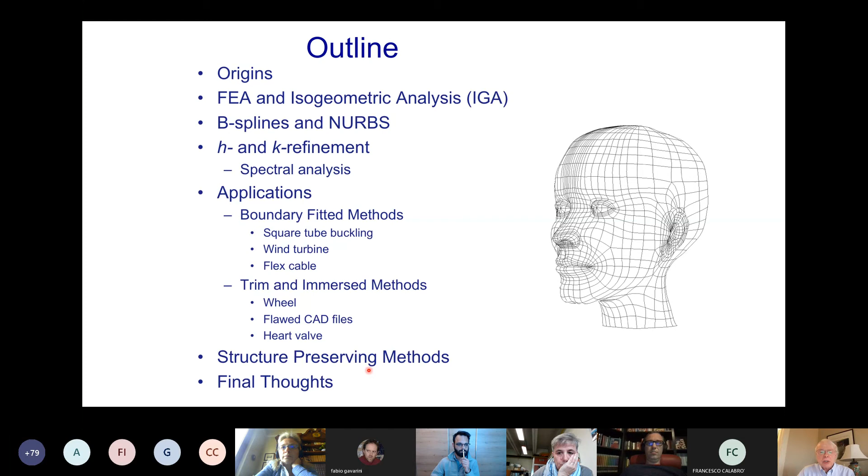Then I'll show a number of applications just to show you that this topic has gone from, let's say, its elementary beginnings to more complicated real-world applications. And then, as I said, a little bit about structure-preserving methods and some final thoughts.

So the origins of IGA really began when a number of individuals were telling me about problems they were having in industry. In industry, when you do engineering analysis with finite elements, the finite element models are created from the designs. The designs are encapsulated in CAD representations, computer-aided design representations. The interesting thing about that process is it's much more complex and time-consuming than one would initially imagine. You have to fix CAD geometries to make them suitable to generate finite element models, at least traditional finite element models. And this accounts for a huge portion of overall analysis time. It's a major bottleneck in the product development process.

There was a study done at Sandia National Laboratories, and there they have about 10,000 people, and most of them, I'd say, are computing. And so they do an inordinate amount of finite element analysis. So they were able to get very good statistics on the process. And they sort of confirmed that and documented that in a famous report, the DART report. But this comes from all different sources. The Navy, the US Navy, was very influential in getting me to look at this problem, because they were getting situations that were even much worse than this.

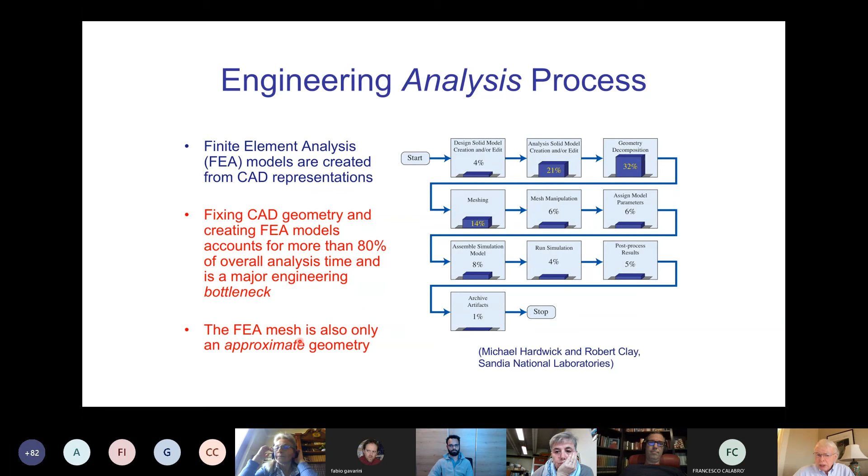In addition to creating the mesh model, you have to do certain things. You have to remove features. You have to heal damages, flaws in the CAD file. And in the process, you really recreate the geometry. So you wind up approximating the geometry. And that can be severe if it comes to higher order techniques.

So what's the problem? Why is it so time consuming? Well, this is a simple model. This is just a part from a Honda. That's a B pillar. And it's one piece of metal. It's been cut, stamped, holes have been drilled into it. And so you would imagine it would be very simple to generate a finite element mesh for that part.

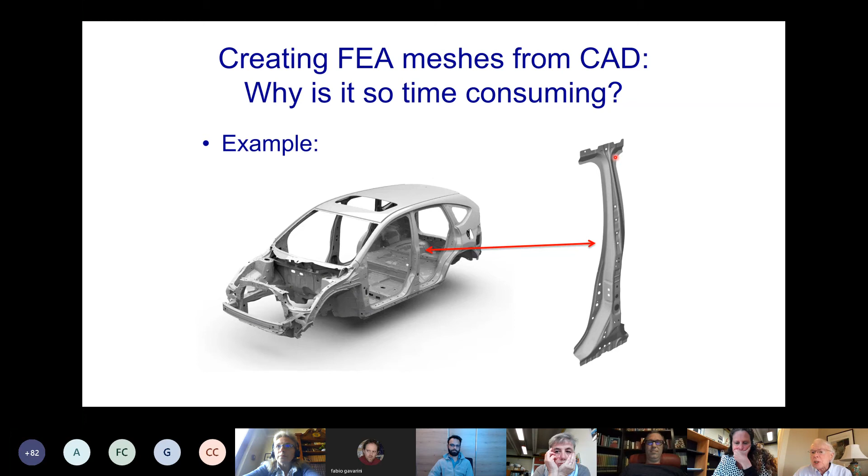Well, it's not so simple when you come to the data structure. The actual data structure consists of 1,280 so-called trimmed surfaces. Those are images of rectangular patches that intersect, and those intersections are not watertight.

Mathematically, they can't be, given the underlying order of the functions that are utilized. So you have gaps and overlaps, and to produce a classical finite element mesh, the CAD file has to be rendered watertight. And so you have to fix it. And that becomes an ordeal. Imagine this one little piece consists of 1,280 images of rectangular patches.

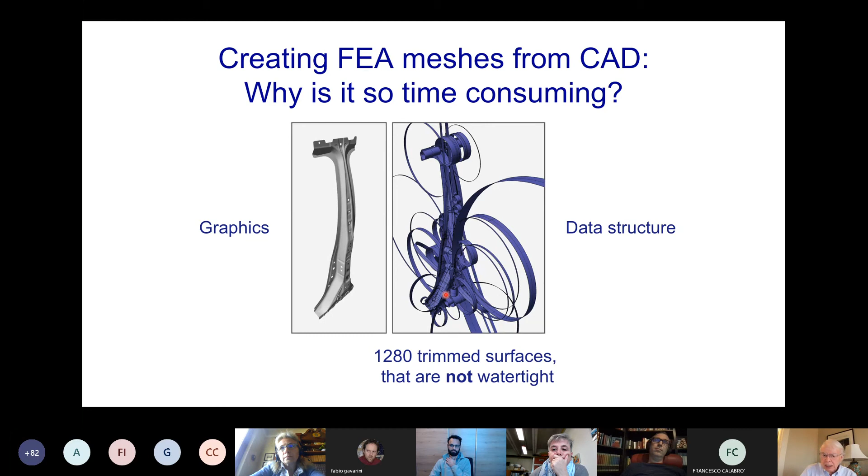So what are the problems in total for FEA? Well, model creation, as I just indicated, geometry errors. If you have to make simplifications, you might be removing fillets, small holes, replacing fillets with sharp corners, things of this kind that can really change results.

Another problem is closing the loop with design optimization. You want to automate the design optimization process, so you have a loop doing forward analysis, and then you change the design according to the outcome of that analysis. Now, in traditional FEA, once you're done with the analysis, you have left the data structure of CAD, and you have to bring the FEA results back to CAD. And sometimes that amounts to just walking down the hall and telling the designer what the changes are that need to be made. You'd like that to be completely automated. So this is a problem with FEA.

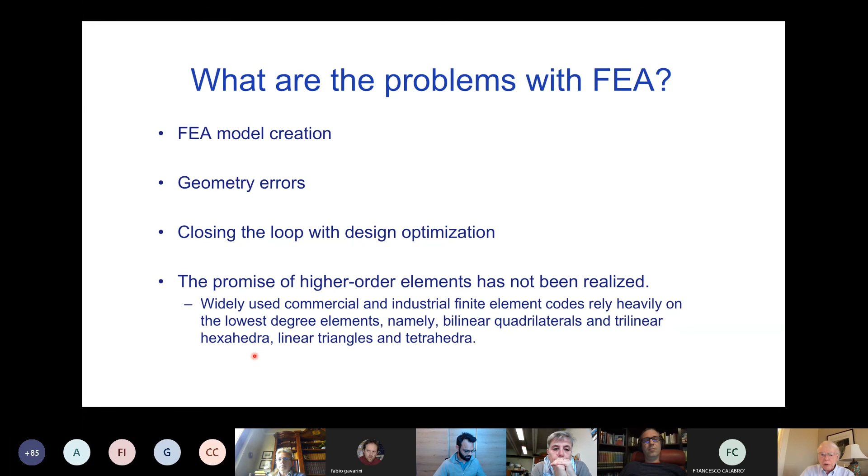I'd say the final problem, and one I'll speak to as we go along, is the promise of higher order elements in FEA has not been realized. If you look at widely used commercial and industrial finite element codes, they rely heavily on the lowest degree elements in structures, bilinear quadrilaterals and trilinear hexahedra, and in fluids, linear triangles and linear tetrahedra. So why is that? I mean, the academic literature would suggest that higher order elements are capable of higher order convergence rates, but we'll see there's a problem that is not discerned by traditional functional analysis techniques.

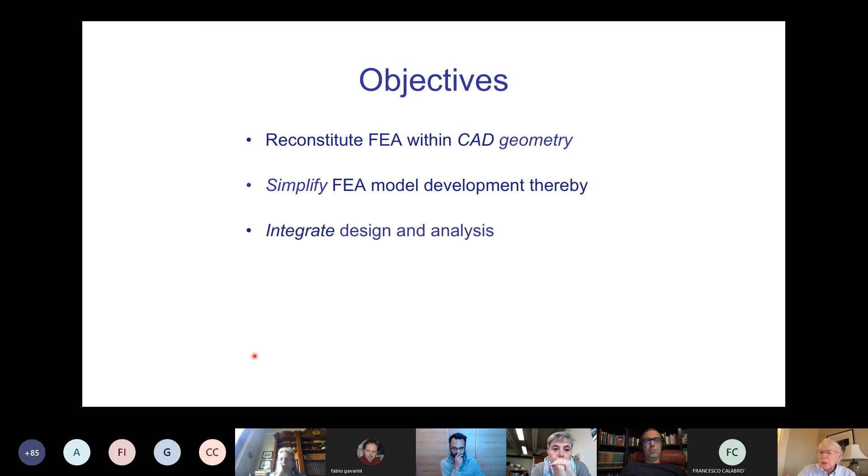So the objectives of isogeometric analysis from the start were to fix this problem of the development of models by reconstituting finite element analysis within CAD geometry, and to simplify the model development thereby for analysis, and to integrate design and analysis. And that was the original goal. So as Carla mentioned, the first paper was published in 2005. It was me and two of my graduate students at the time, Austin Cottrell and Yuri Bazilevs. And that was the beginning.

If you go to Web of Science, for example, and you put the topic isogeometric in, you'll find now there are over 3,000 papers on the subject and over 72,000 citations to papers. And there were over 16,000 last year. This is still growing more or less quadratically. So it has garnered quite a bit of attention, and people are using it for all different things.

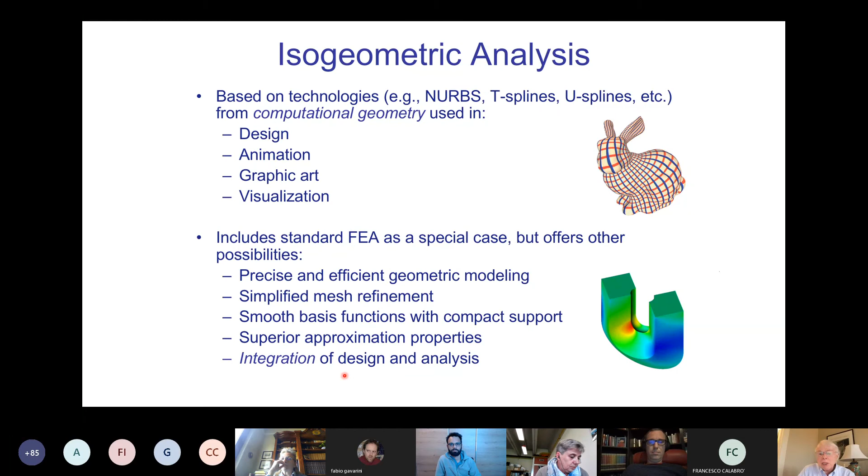So what is it? It's based on the technologies that come from computational geometry: NURBS, T-splines, U-splines, various unstructured splines, subdivision surfaces, etc. And these, as you may be aware, are used in design, animation, graphic art, visualization. Now, in fact, classical finite element analysis can be found embedded in here as a special case, but these techniques offer greater possibilities. In particular, precise and efficient geometric modeling, simplified mesh refinement strategies. You also can produce smooth basis functions with compact support. Smooth basis functions open up the possibility of solving higher order partial differential equations with very, very simple techniques. And what we found that we didn't realize early on, and as you'll see, superior approximation properties. That is a surprise and was a surprise. And of course, the integration of design and analysis procedures.

So although I started my career as a designer, I became an analyst shortly thereafter. And so I sort of view isogeometric analysis primarily through the lens of analysis. And I think if one does that, one can think of it as a superset of technologies that contain traditional finite element analysis. The usual techniques for improvement: mesh refinement, H refinement, polynomial refinement, say on a fixed mesh, some linear combination of the two. But what you have as sort of the secret weapon of isogeometric analysis is K refinement, where in addition to raising the degree of, say, the underlying polynomial basis, you also increase its smoothness simultaneously.

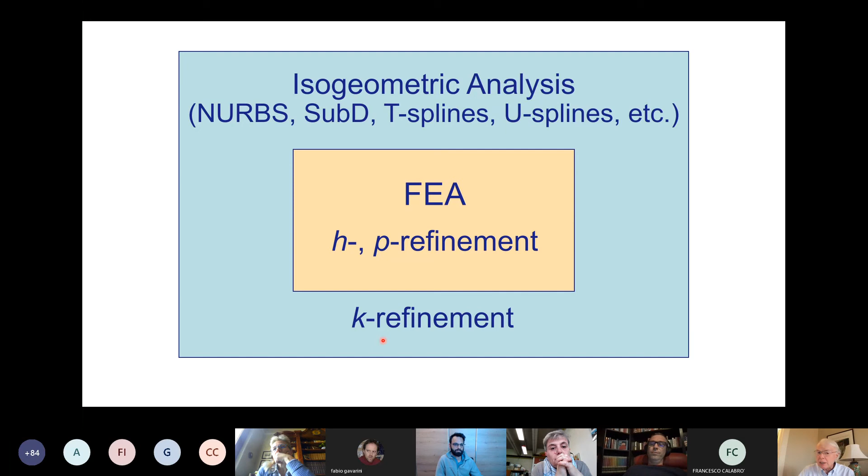So let me begin with a tutorial on B-splines and NURBS to get everybody sort of accommodated to the basic ideas that we'll be developing here. B-splines are polynomials. They're piecewise polynomials, and they're defined on a patch, an interval, that is divided into sub-intervals that are bordered by so-called knots, xi and xi plus 1, or consecutive knots. And there's a famous Cox-de Boor recursion relationship for deriving higher order splines, starting with the piecewise constants defined on this decomposition of the patch. So you go from constants on the right-hand side to linears, and then you put linears on the right-hand side and get quadratics, etc.

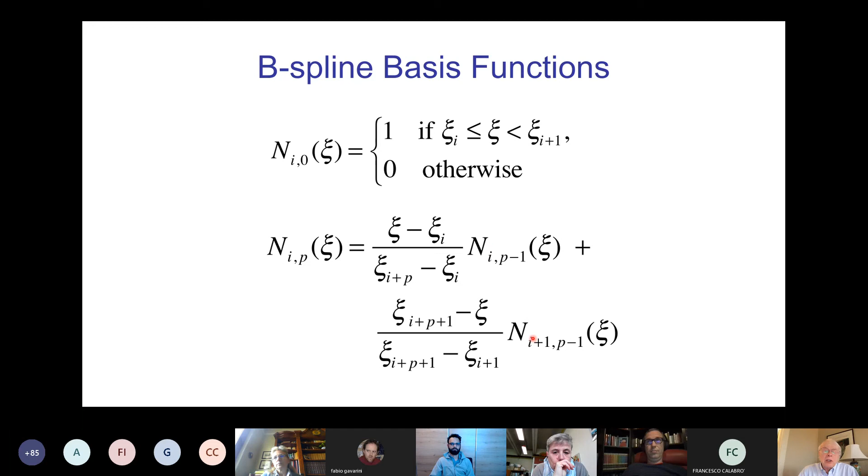If you do that for a uniform knot vector, where the knots are just spaced uniformly as you see here, you start off with the constants, you get the linear chapeau functions of finite element analysis, and then you go up to quadratics, and then it looks different than finite element analysis. You're getting functions that become smoother as you go to higher order, and they span additional knot spans. So these are quadratics.

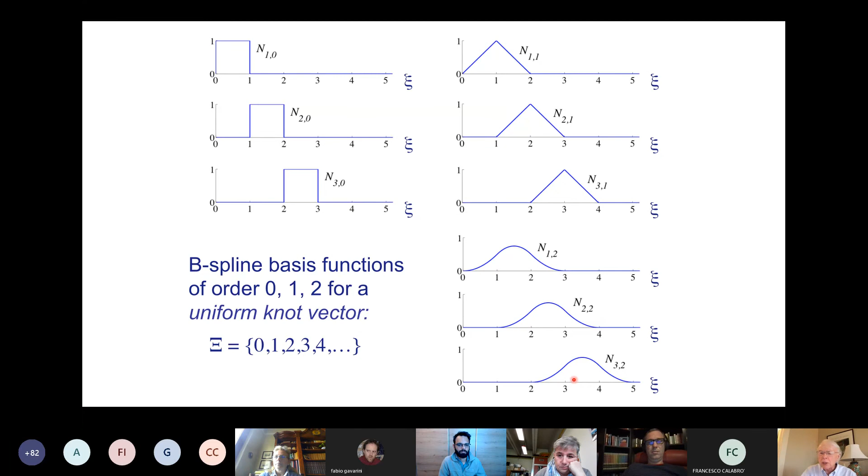They are C1 continuous. The linears are C0 continuous, and the constants are C minus 1 continuous. If I go to the next level, to cubics, I would span 4 knot spans. They would be C2 continuous. And in all cases, the functions are pointwise positive, unlike the interpolatory polynomials of finite element analysis, the Lagrange basis, for example.

Here's an example of a patch going from 0 to 5. The multiplicity of the knots at the end is p plus 1. These are quadratics, and you can see the multiplicity is 3 here, p plus 1. It's non-uniform because at this knot we have repeated it. We could put other knots in unequal spacing, but in this case we've just done this. What you see is the C1 continuity, once I repeated the knot, drops down to C0 continuity. Each time you repeat a knot, you reduce continuity by 1.

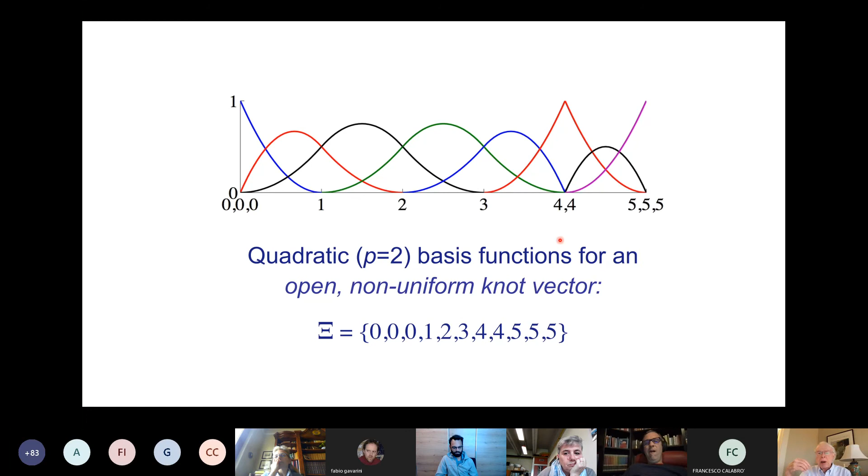If I repeat it again here, I would split the patch into 2. So that's the idea: you have control over polynomial degree, and you have control over the continuity.

From the design point of view, you would take this basis, this global basis, and you can make a geometrical object out of it by multiplying each basis function by coordinates. Those are the control points. So we've just done that in the plane. Each of these, let's say, xy coordinates, is multiplying one of the basis functions.

You can see where it's only C0 continuous, you have this kink here. Otherwise it's smooth. Now it's also interpolatory at the ends where the knots have multiplicity p+1, as you can see. This is sort of the design point of view. If I move a control point, I will monotonically move the object, distort the object. That's one of the reasons that emanates, in essence, from the properties of these functions.

It's unlike classical finite element analysis, where you have interpolatory polynomials. If I move one node, I may engender oscillations all over the place. You don't want that in design, for obvious reasons.

Now, that's the design point of view. But there's another point of view that is equal to it, and it is a decomposition of this into elements. These are the elements in a finite element sense. They are the images of the knot intervals here.

So this is 0 to 1, 0 to 1, 1 to 2, etc. It's the images under this mapping. This is exactly the same geometric object, but now we're looking at the element structure. And what we can do is, through a procedure called Bezier extraction, we can reduce the processing of this object to a sum over all the elements, in which case all the basis functions in each element are identical.

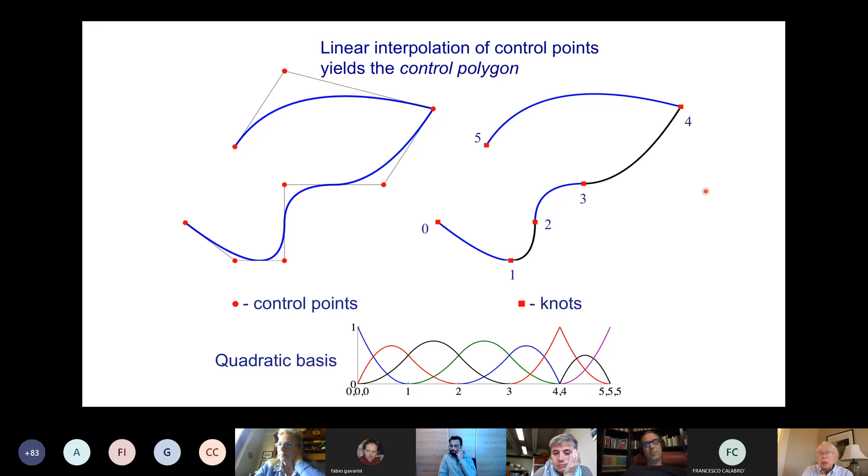They would be the Bernstein polynomials. So we really can look at the geometric objects from a finite element point of view, in fact, from a classical finite element point of view. And that, of course, is the preferred way to assemble models in isogeometric analysis. So you have this, in essence, this bijection between these viewpoints.

You can refine the mesh, just as in finite element analysis. So what we've done is we've just inserted a lot more knots. You can see the control points now are moving toward the object, because the object isn't changing. We are doing refinement embedded in the geometry, unlike finite element analysis, where you don't even know what the geometry is when you start refining. You have to go look for it in the CAD file.

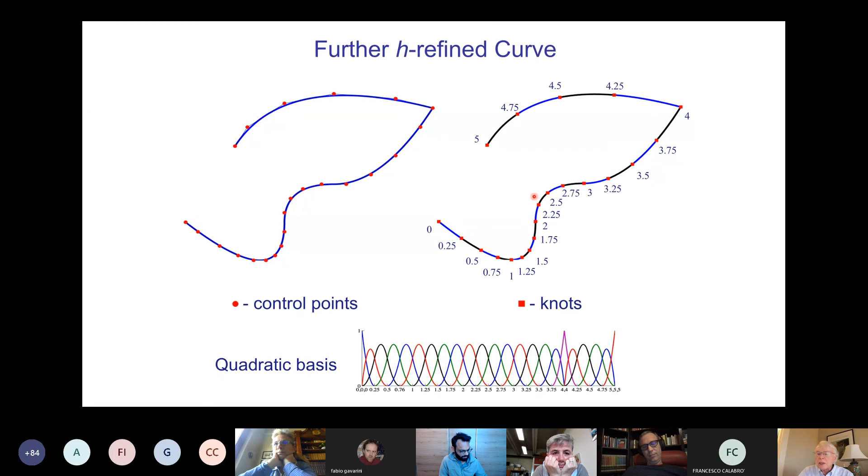So now we have a finer mesh that we might need for analysis, and we can do it again and again, as you can see. And as we do that, the control points will converge toward the object. That's classical H refinement. We can also do P refinement.

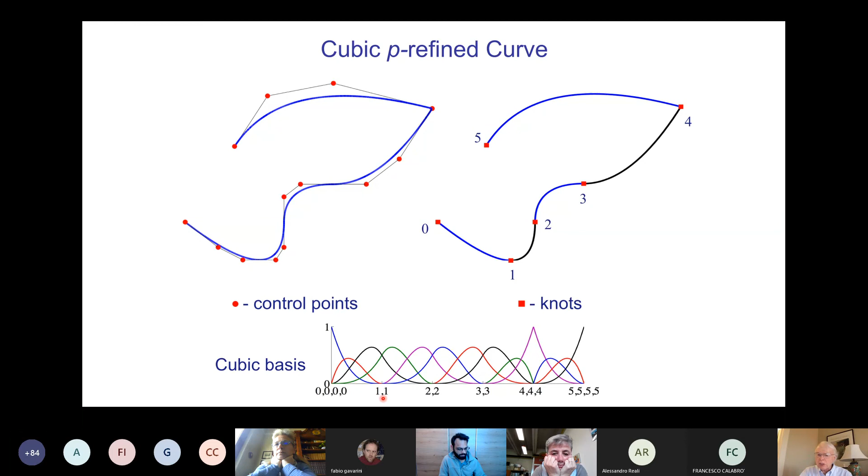So we start over. This time, we don't change the element structure. We're just adding functions. And since we want the same continuity, parameterization, what we do is we repeat knots. We started off with quadratics that was C1 continuous. Now we have cubics. To make those only C1 continuous, we have to repeat each knot, as shown here. And we can do that again to our heart's content up to quartic.

Now, the most commonly used CAD technology in engineering is NURBS.

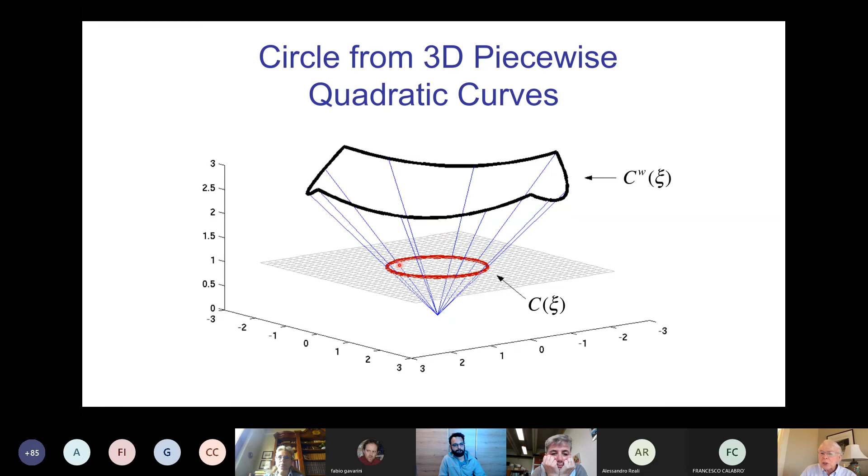And you project those according to this mapping that you can see visually here, which amounts to creating a rational polynomial. And you can get an explicit representation in terms of those polynomials of a circle, and in fact, all conic sections. And obviously, these are extremely important in engineering, as you can see from these objects here. You have to have perfect circles and conic sections.

So how do you do that? Well, in essence, to create, let's say, a toroidal surface, you could take the construction for a circle, and then you just take a product construction, and you would have a control net like this and a mesh like this. These are quadratic C1 continuous splines. That's a perfect torus, okay, with 16 elements.

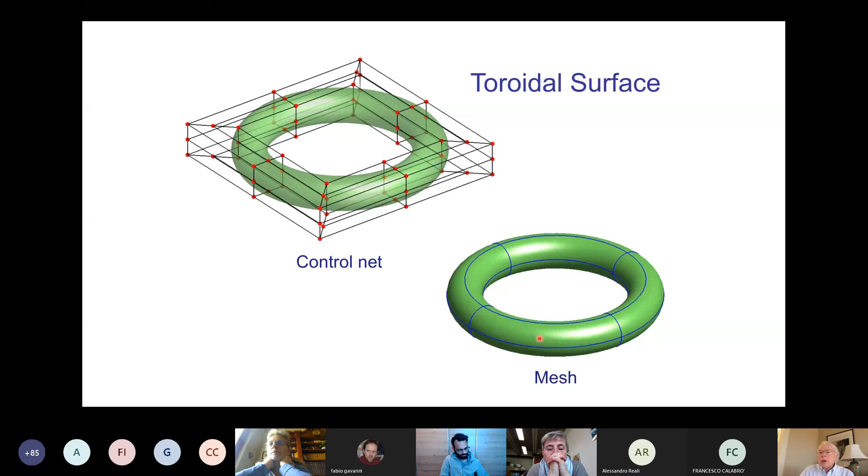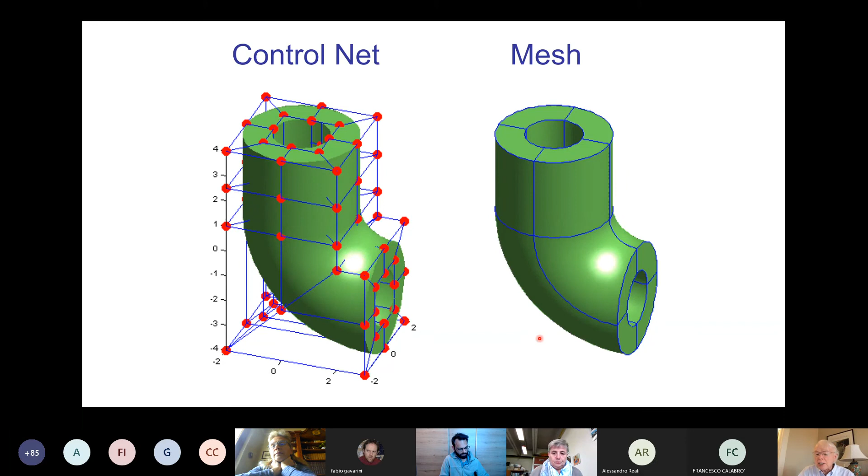Now, you could refine it. And again, you refine it in place. The geometric object is not changing. You could order elevate the basis functions. You have the same mesh, but you have many more basis functions of higher order as before. And then you can take this idea of tensor product development of splines to 3 dimensions and build objects like solids. For example, this pipe elbow. So it's very neat technology, very precise, and yet you can do freeform modeling as well, as we showed with the curve.

So let's talk a little bit about the analytical consequences of using these functions, which are now rational functions. Well, first of all, they have compact support. That was self-evident, I think, from the pictures. They satisfy a partition of unity. They sum to 1. They possess an affine covariance property, in which if you apply an affine transformation to the control points, that transformation is respected pointwise throughout the object. So all rigid motions, rotations, uniform stretches and shearings are exactly represented in the physical space.

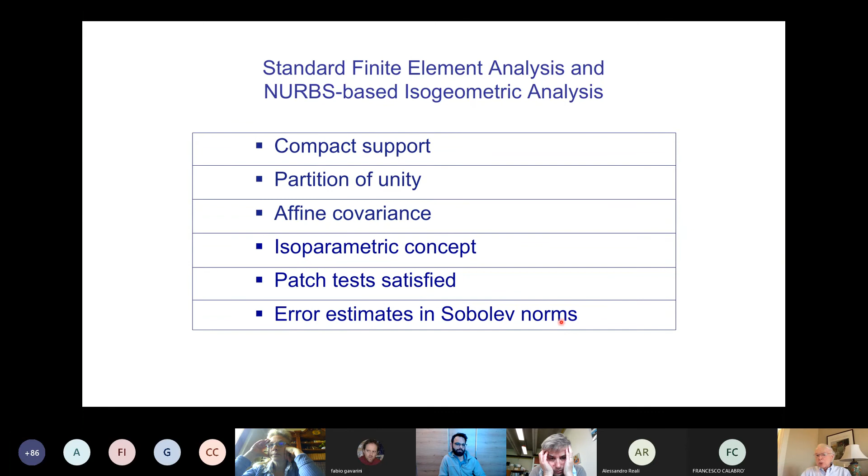Now that in the isoparametric concept, which is a modeling concept appropriate to mechanics, in which case you draw an equivalence between the geometry representation and the motion of the object, they have to be coming from essentially the same space, the same basis functions. You can then prove all patch tests are satisfied. These are engineering convergence criteria, although they have been mathematized. But likewise, you can prove error estimates in Sobolev norms. And that really begins with the serious mathematical aspect of the subject.

And to do mathematical analysis of PDE models in a variational setting using function-based techniques like finite elements or isogeometric analysis, you need error estimates, at least for linear PDEs. You need approximation estimates in Sobolev norms. So once you have that, you can use all the same techniques that you've used to do classical finite element analysis, convergence proofs, error estimates, etc. And so this began with a paper that we wrote in 2006, and it was the basic estimate for Sobolev norms for approximations with NURBS.

And it looks somewhat like the usual one for finite element analysis. In fact, you could almost say it looks very much like it if you would absorb the geometric factors into the constant here. The geometric factors, F is the geometric mapping, they have been split out here. And that shows you that there is an effect on accuracy of the parameterization. So a well-parameterized object is better for error analysis than one that is not. Rather obvious, probably. Well, this is just the Sobolev norm of the target function. There are many things buried in the so-called constant, namely the dependence on the polynomial order, the smoothness of the functions, but they're hiding in there.

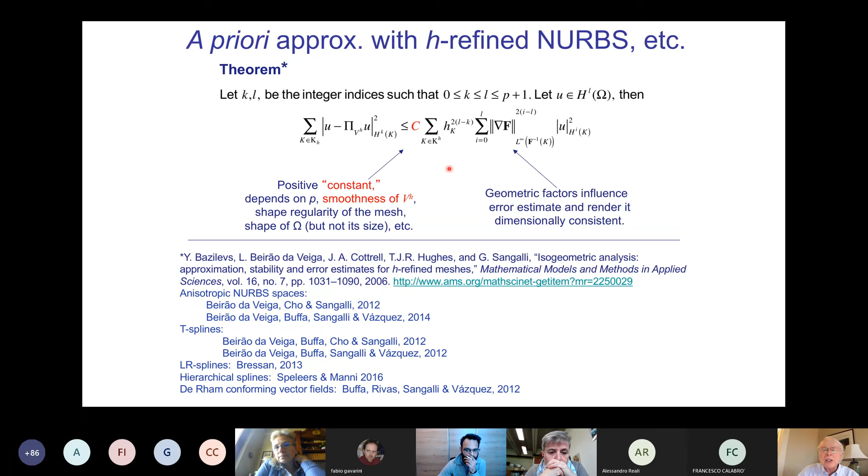But the main thing here is this is useful for classical mesh refinement, because what you have explicitly is the power of the mesh parameter. This is the size of the elements. And the exponent here is the optimal estimate for these Sobolev norms, and they are exactly what you would get under the best of circumstances with classical finite element analysis. So everything at this level of mathematics looks the same. And then there were a slew of studies thereafter that have been looking at this more deeply under more general circumstances. But with this, you can prove theorems as one has been doing for years and years in classical finite element analysis. So what do they tell you? Well, they tell you the rate of convergence of a problem, say an elliptic boundary value problem, when you refine the mesh in the classical way. So we'll take a look at that.

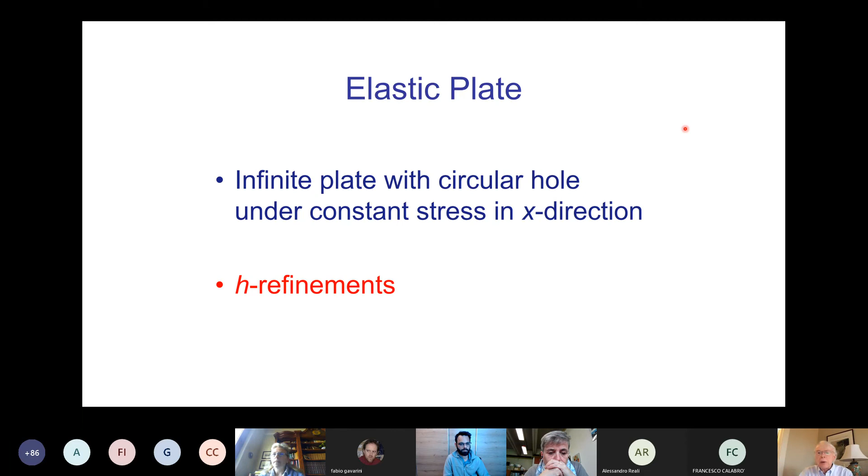We'll take the classical solution, just as an example, for an infinite plate with a circular hole. You can model a quarter of the plate. You don't model infinity; you just put the exact solution on the boundary. This is an exact circle, so these are really NURBS. This is a 2-element mesh, and it's just bisected up to mesh 6 here.

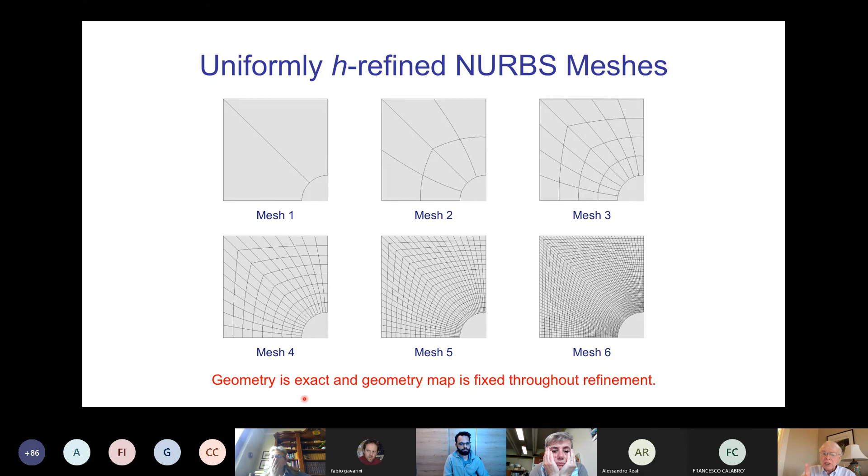One thing to keep in mind is that despite the fact we keep changing the mesh as we refine, the geometry map is fixed. It's exact throughout the refinement. It never changes, unlike finite element analysis. So that complicated expression I showed you with the gradients of the geometry map, that part is fixed in the error estimate.

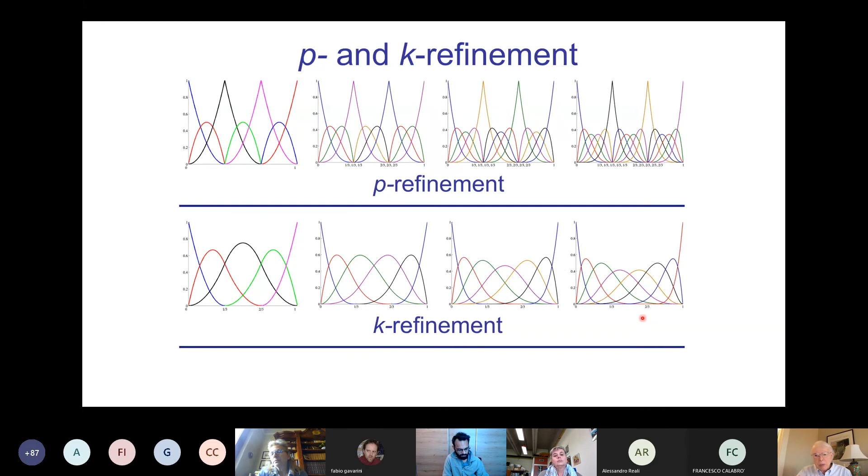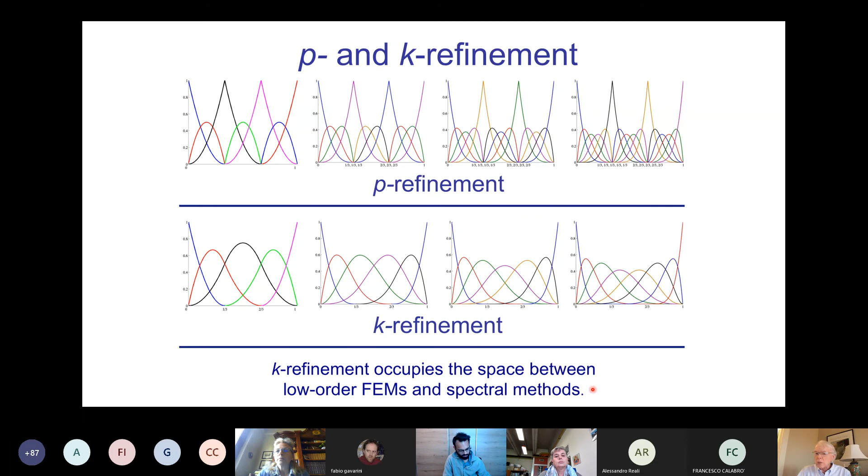Now K-refinement, in some sense, is the same idea. You start with quadratics, you go to cubics, quartics, and quintics, but each time you raise the order, you raise the continuity level. So you go from C0, or C1 I should say, to C2, to C3, to C4. If you just count the functions, there are many fewer, even in this simple 3-element test. Keep in mind, we have the same number of elements, so the same mesh parameter and same order of approximation, but many fewer functions. So what is this? This is sort of a new technology. It occupies the space, in my mind, between low-order finite element methods and spectral methods. We never had tools like that, at least to my knowledge.

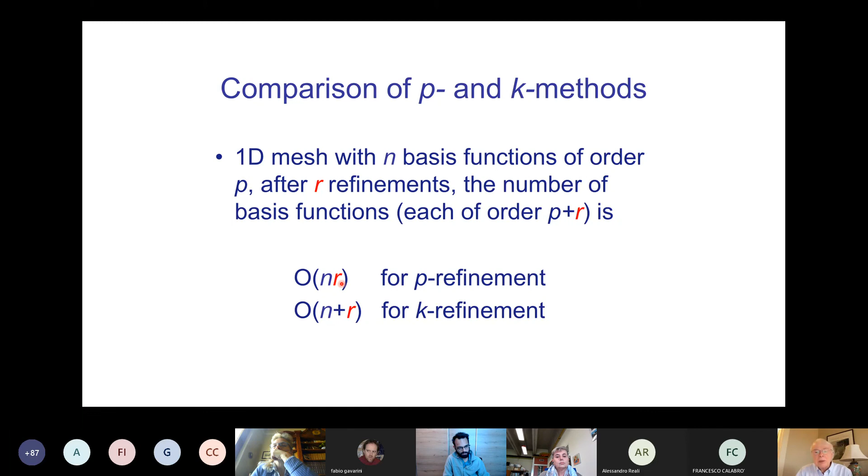So let's compare classical P refinement and K refinement. Start with a one-dimensional mesh, n basis functions of order P, and then we're going to do R refinement levels. What are the number of basis functions? They're going to be order P plus R, same. For P refinement, they're going to be order n times R, and for K refinement, order n plus R. Obviously, if n is big and R is maybe 5, something like that, this number is going to be much bigger than this number.

It really becomes dramatic when you go to multi-dimensions. When you go to 3 dimensions, for example, if I start with a mesh with 100 control points in each direction, so 1,000,000 control points, 100 by 100 by 100, and I do 10 levels of order elevation, I would wind up with about 1.3 times 10 to the 9th control points. So starting with 1,000,000 control points, I go to 1,000,000,000. Now with K refinement, I start with 1,000,000, and after I execute the same process, going through 10 refinement levels, I'm still order 1,000,000 control points. You're basically asymptotically not changing the number of degrees of freedom.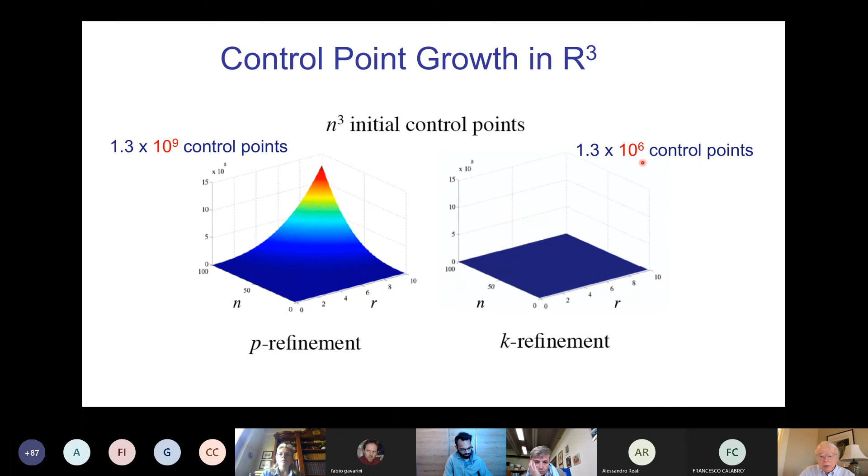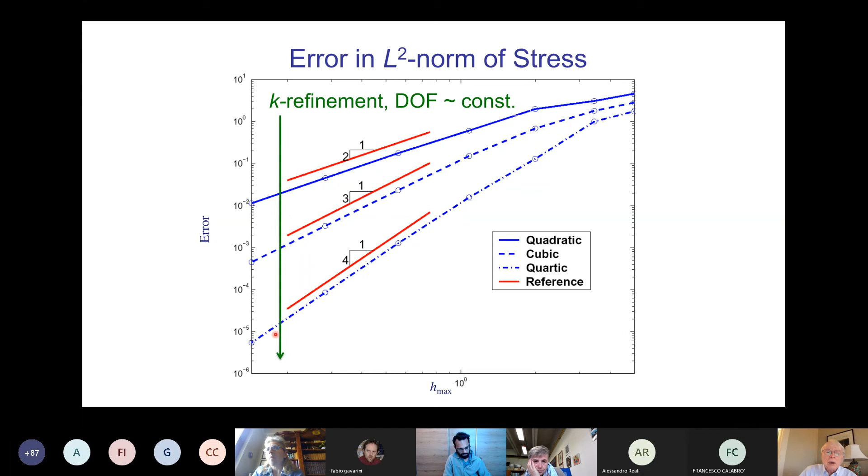That's an amazing advantage, because you're working on the same mesh with the same order of approximation. So the way to think of K refinement then is I'm sort of dropping vertically, at least asymptotically. I'm dropping vertically, keeping the mesh constant. And in doing so, even though the degrees of freedom are not proliferating as they are in P refinement, I'm picking up very large increases in accuracy. Here in just 2 levels, we go through over 3 orders of magnitude in improvement. So it's sort of a magic technology.

Now, the first thing, because we're using functions that span more elements, it kind of intuitively seems that the bandwidth must be increasing. That's not the case. And here's an example that just illustrates that. If I have C0 cubic finite elements, and I look at the coupling between this function and all the adjacent functions in the mesh, you can see I couple to 3 to the right and 3 to the left. And if I have smooth C2 cubic B-splines, here's a function here, I have 3 to the left, 3 to the right. In both cases, the bandwidth is exactly the same. So there is not really a bandwidth increase, but the band is more densely populated. That hurts you on a direct solver, and it helps you on an iterative solver.

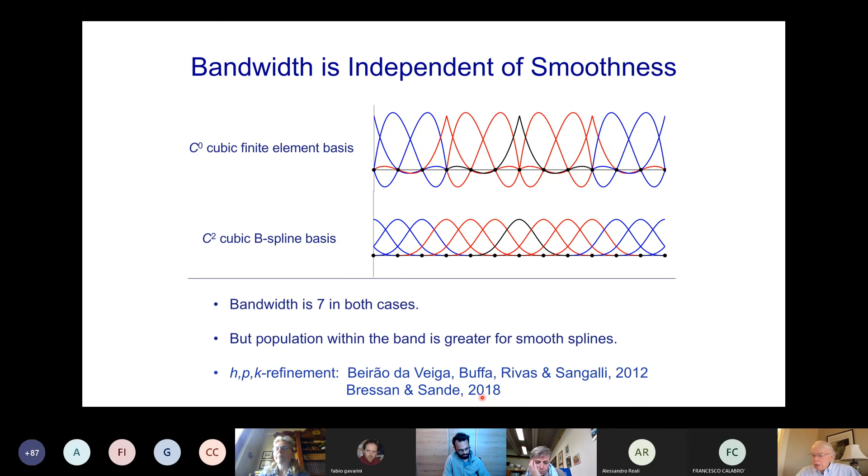And there have been now some mathematical studies that began to look at the K refinement process, beginning with Lorenzo Beirão da Veiga et al. in 2012. And then I think some real breakthrough was made in the work of Bressan and Sande, who will be giving some of the lectures in the class to follow. So let's look at K refinement versus traditional higher order finite element techniques by way of spectral analysis. The functional analysis approach tells you something. It really is telling you something asymptotic. It's not giving you the picture of what's going on in the total mesh that you're working with.

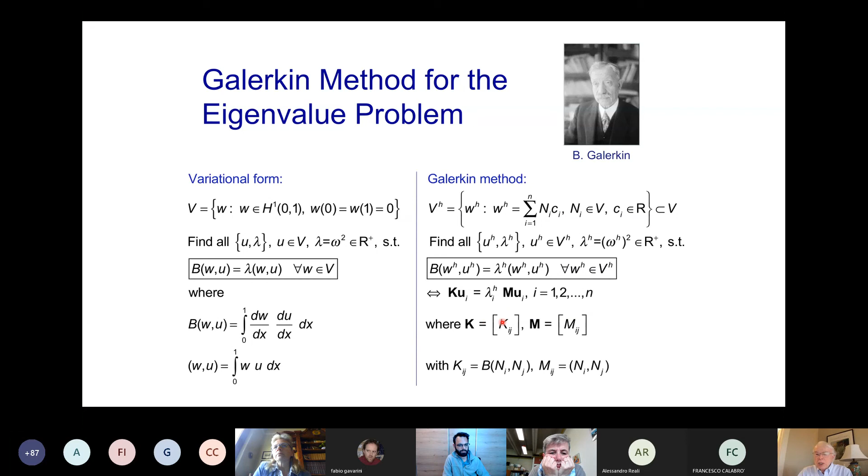So to study this problem, we'll look at the Galerkin method for the eigenvalue problem. We'll formulate it in the usual Galerkin way, variationally. The configuration space is H1 with 0 boundary conditions. This is the energy inner product, and this is the L2 inner product. So the Galerkin method is just to approximate the weighting function space and trial solution space with an expansion in terms of basis functions. And after you do that, you get a matrix eigenvalue problem that looks just like this. A classical way of generating finite element methods, for example.

Now, the error analysis. The error analysis relies on the approximation results like those I presented earlier. And it's really, again, the same for finite elements as it is for NURBS or B-splines. So for an order 2s differential operator, you get these results. This is the eigenvalue error. This is the eigenfunction error in the energy norm, and the eigenfunction error in L2. And you notice you have this factor h times an eigenvalue. So as you go to the higher eigenvalues, this number is getting larger and larger for a symmetric positive eigenvalue problem like this.

And here, for eigenvalues, you get the usual factor of 2 times p plus 1 minus s, and p plus 1 minus s for the energy norm. And here in L2, it's a little bit more interesting. I won't go into that, but it says you might get some surprises for certain elements. That's true for finite elements as well as NURBS and splines. So the important point, though, is this factor in here has to be sufficiently small or you're not converging. It's got to be less than 1, obviously.

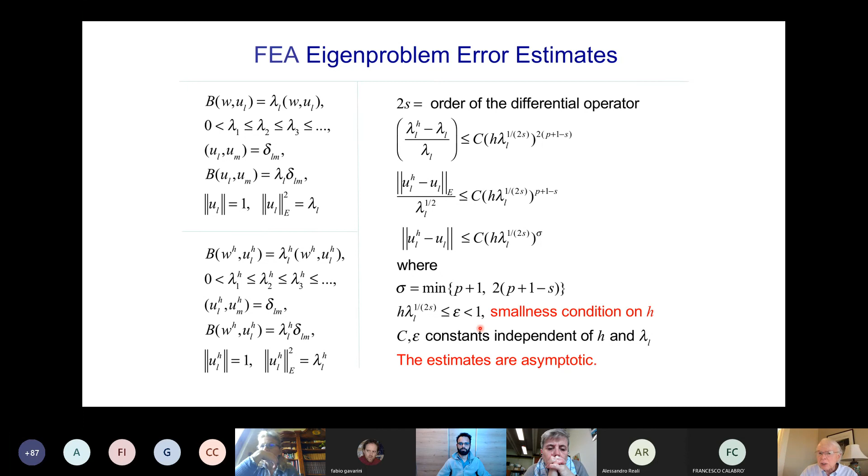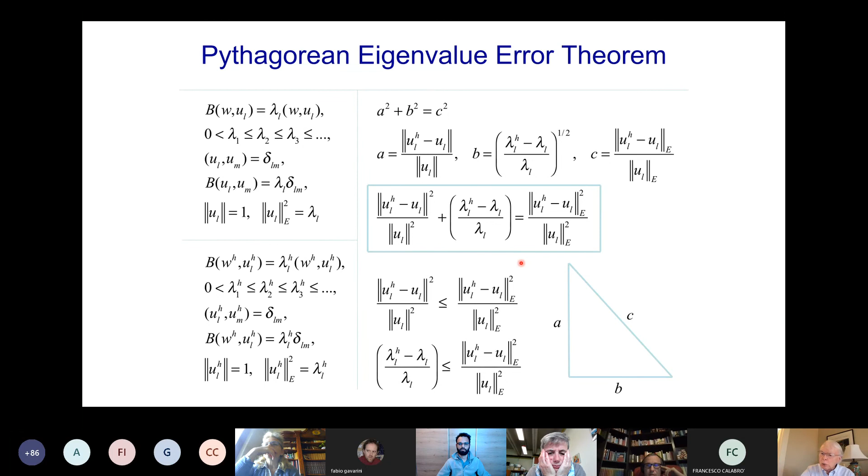And the fact is, for the higher modes in your system, it's not going to be small. So this result is telling you something about the lower part of the spectrum. They are asymptotic results. They're hiding from you information about the spectrum in its totality that's in your discrete model. And the way to investigate that issue is to look at something that I call the Pythagorean eigenvalue error theorem. And it combines those 3 error measures into one expression, and it holds for every mode in the system, every mode. So in some sense, it's not asymptotic, it's global for the case at hand.

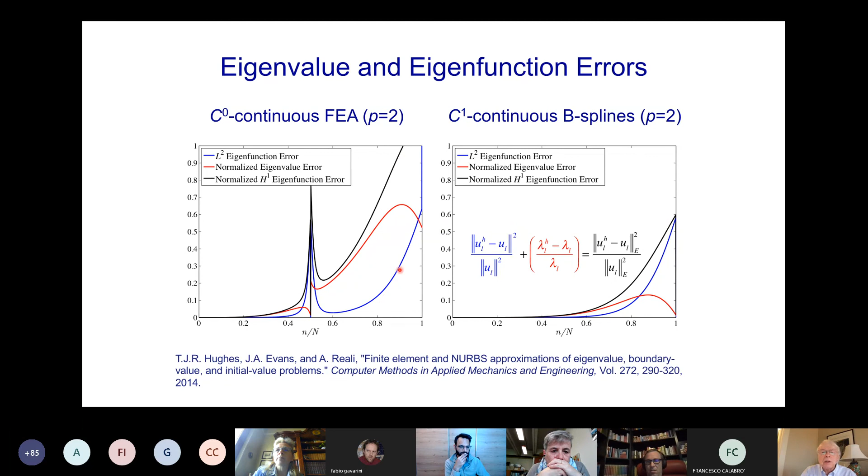Now you might say, well, that's the way finite elements work. We all intuitively believe that. Well, intuition can be misleading sometimes, because it's not the way finite elements work. Finite elements are bizarre. The upper part of the spectrum is really bad, as you can see here, and you get a spurious spike right in the middle of the spectrum. So the errors are enormous here, and they're enormous here. So as in the case of splines, you might hope, well, as I go to higher order, things should get better.

And once you're in, say, a hyperbolic PDE, things will propagate. So the whole solution will be vitiated by the errors that were created in some high mode, someplace, and it goes every place. And in nonlinear analysis, it's a disaster because of coupling between low modes and high modes. So it's no wonder these techniques are not widely deployed for difficult problems. What we find here is that we get more robustness as we go to higher order. We don't have this phenomenon at all. So we'll see the consequences of that.

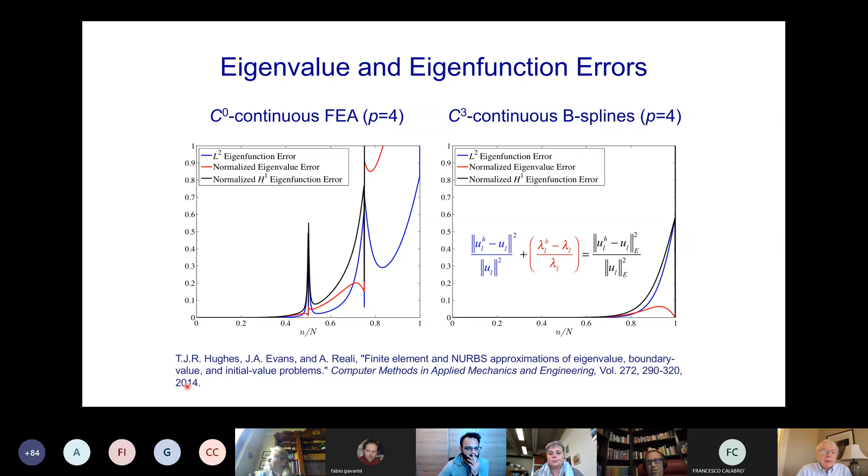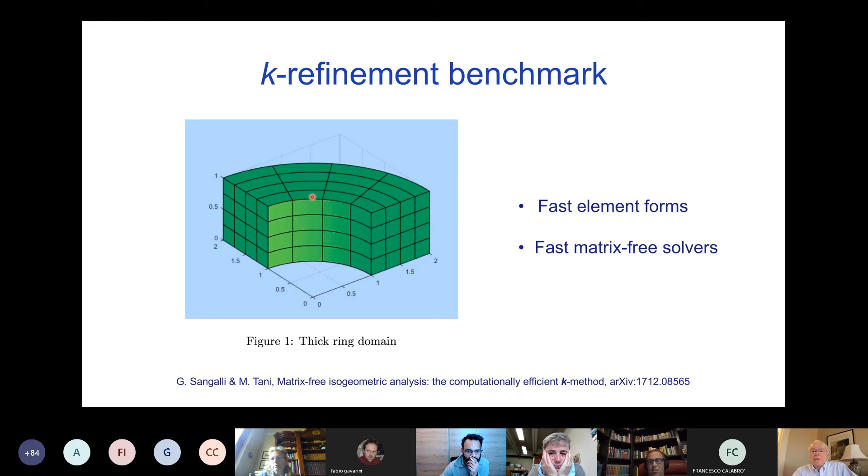What about cost? This is sort of interesting. This is some calculations that Giancarlo Sangalli and Mattia Tani did to show the efficiency benefits of K-refinement. They are using fast element forms and fast matrix-free solvers to solve a problem, and they're doing it both with finite elements and with K-refinement of splines. Now these are pictures for K-refinement. You fix the mesh, and then you just order elevate, and you go from order 1 to order 10. So this is a 64 cubed element mesh, order 1, 2, 3, up to 10, and each time you have maximum smoothness.

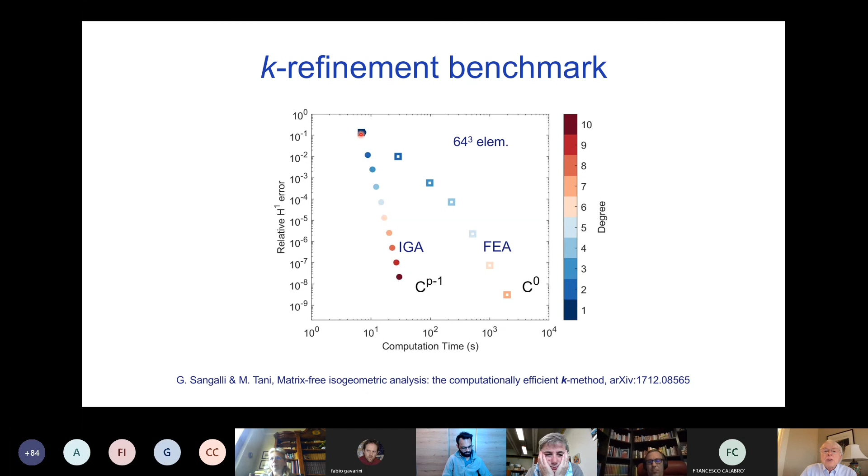And you can see something very interesting. Let's look at this one. As you K-refine, the cost is not increasing enormously. And at the same time, you're improving the accuracy by 7 orders of magnitude. 7 orders of magnitude, and the cost is, let's say, order 1. If you just take a particular case, like the 64 cubed element mesh problem, you do IGA, K-refinement over here, and you do FEA, P-refinement over here. For equal error, you can see the cost is much less. When you get down to this level of accuracy, it's about 100 times faster to do it this way than this way. 100 times, that's a big number.

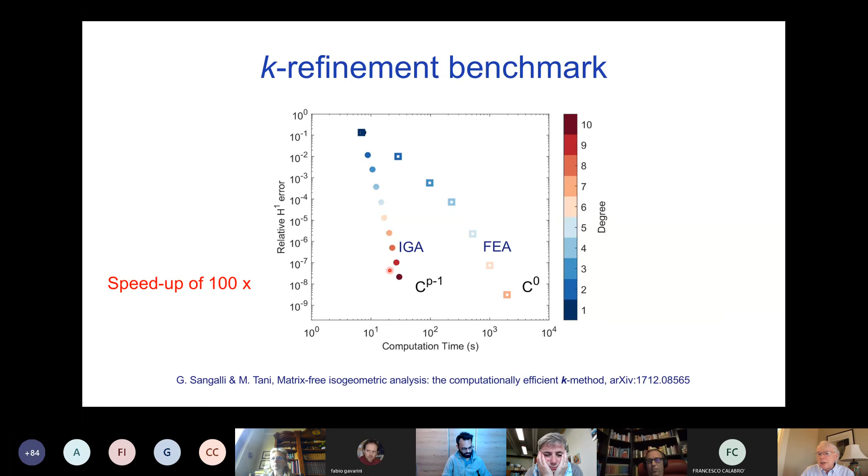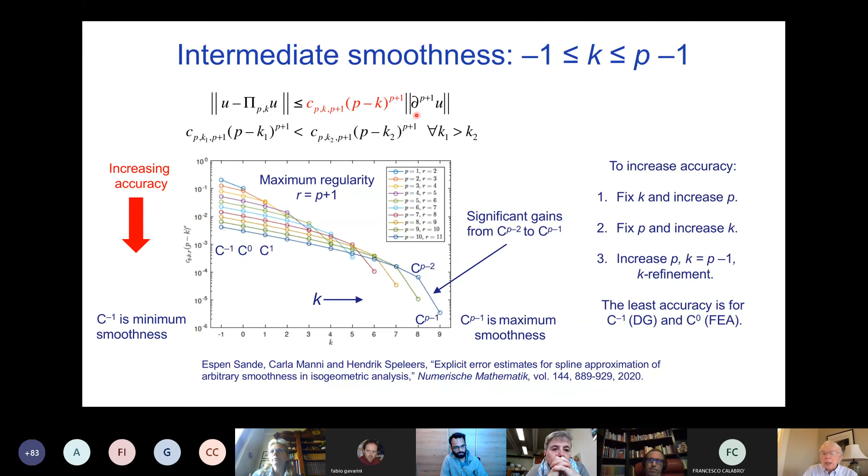So those are functional analysis error estimates. Let's look at some applications of the technology. I mentioned things get more robust. This is a classical buckling problem that's utilized in automobile crashworthiness.

You are driving a square tube into a wall. You have a perturbation at this level to initiate the buckling. And it is modeled with finite deformation plasticity, with basically a J2, so-called J2 plasticity model with linear isotropic hardening. So this was solved in LS-DYNA, which is a commercial crash dynamics code, the major crash dynamics code in the world.

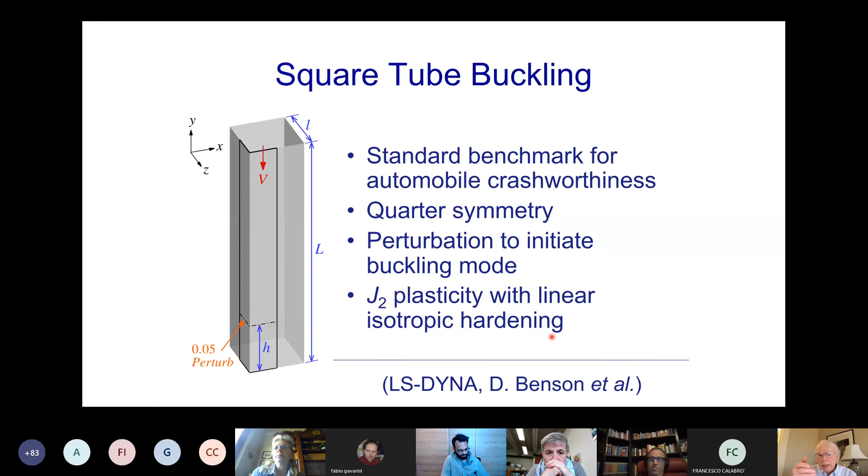And this problem had never been solved with higher order finite elements. The reason is the buckling becomes so severe, you get an accordion shape, as you'll see in a moment, that the elements, the higher order finite elements, start to turn inside out. But here we're working with, say, C3 quartic splines. The number of knot spans is 5 for one spline basis function. C0 at the edges, obviously, to get the kink in the geometry.

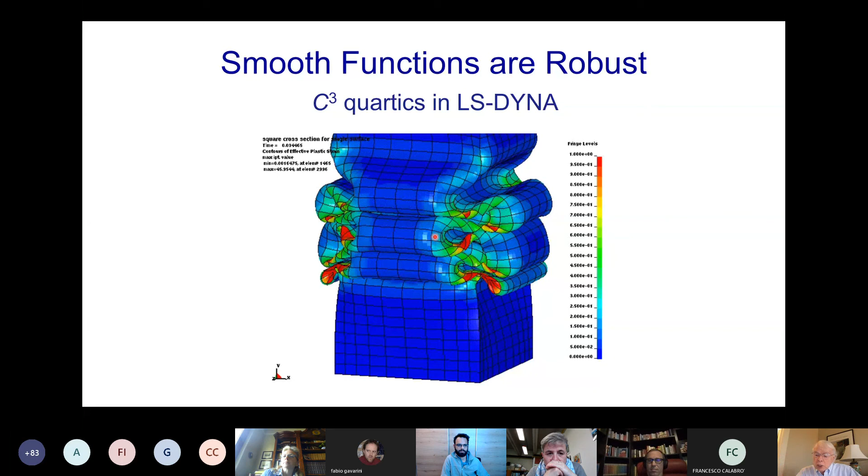But you can see this is a very challenging problem. Lots of contact, lots of buckling. And with classical finite elements, you just can't do this. As you go to higher order splines, you get more and more robustness. Let's look at a wind turbine problem. This problem here is one that shows the interplay with design and analysis. It's a parametric design capability.

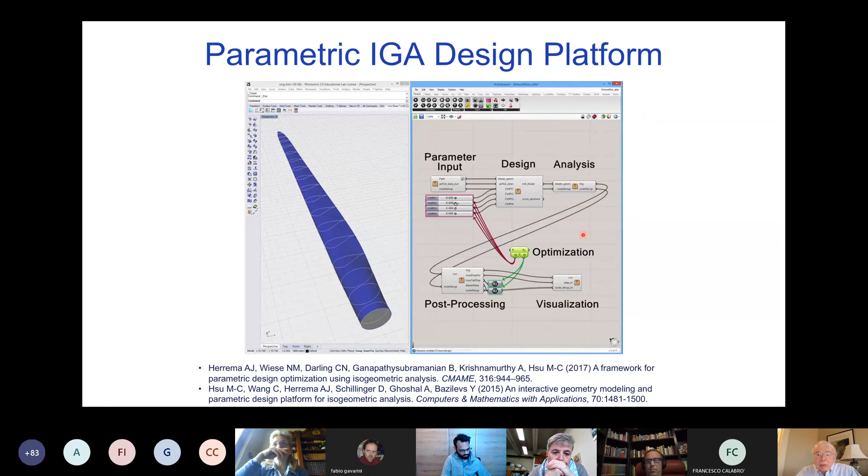So you build your spline model, your NURBS model, and you can parametrically change the design just by moving a slider around. This is the Grasshopper interface, a visual programming language built on the Rhinoceros CAD system. Now, once you build that geometry, you really have your analysis model. And it's a complicated geometry, all composite pieces, and they're all stacks of many layers of many materials. So you use classical laminated shell theory, thin shell theory, and you have all these different thickness distributions for the different components. So it's a complicated real-world structure.

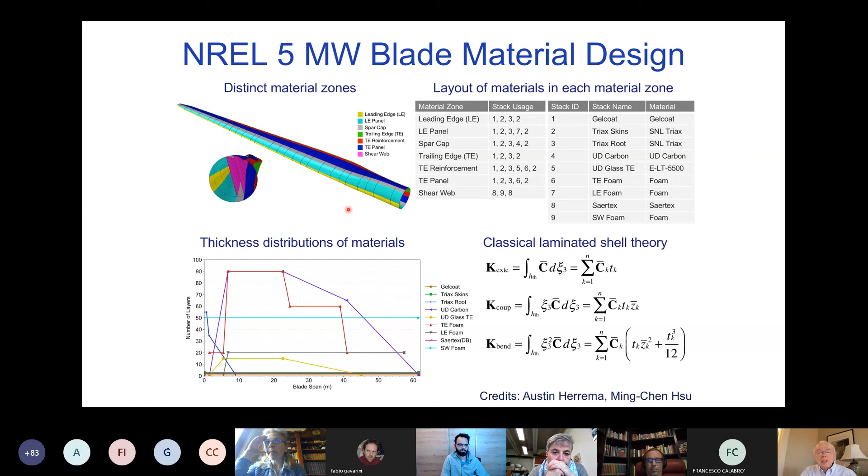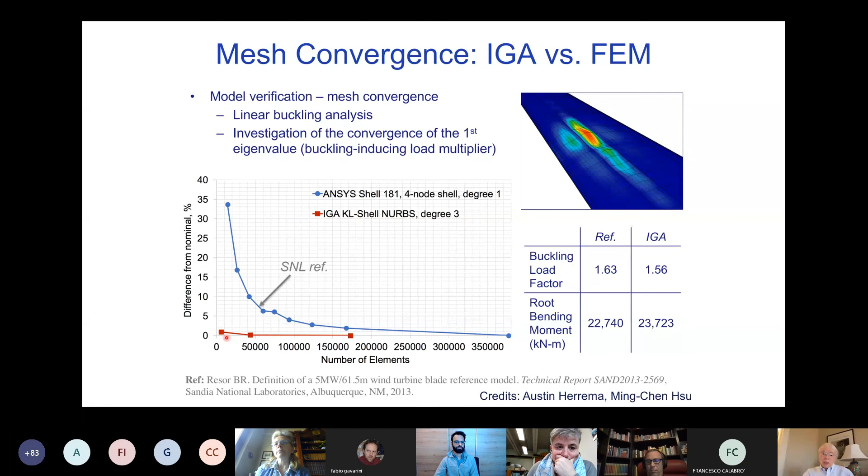In IGA, this is the design model here. This is about 8,000 elements, and it has only 3 degrees of freedom per element here because it's rotation free. So it's about 24,000 equations versus 2.4 million. You can solve this problem in a couple of minutes here. It takes a long time here. And you can see, you can refine it and you basically just sit there, but even the design model is giving you the accuracy. So you can see the potential efficiency gains in something like this. And you have this nice design through analysis procedure.

I'll show you an example from Coreform. This is a flex cable made of many different layers of materials. You can see sort of a cross section here. It's very long. And this is the traditional finite element mesh that was being used with the commercial codes to solve these problems. 10 million volume elements. This is an unstructured spline mesh, a U-spline, 10,900 volume elements. And you can get about equivalent accuracy with those two models.

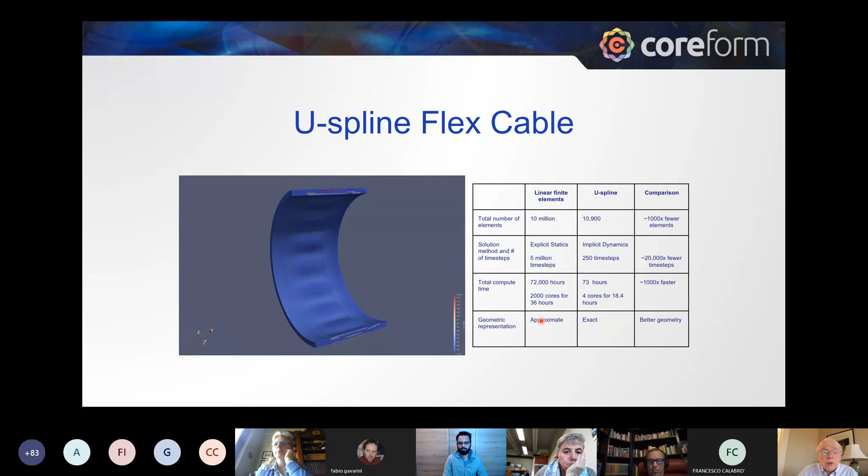You have 1,000 times fewer elements than the finite element case. You have about 20,000 fewer time steps, and you compute 1,000 times faster. And you can see what you're worried about is these things buckling. So you can do these things now as parametric studies. It's impossible with finite elements, and that's why the client here was led to adopt this approach.

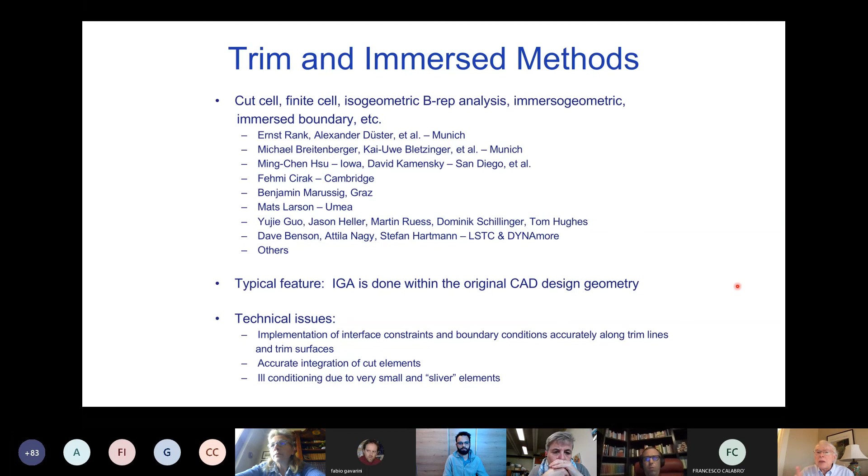Let me talk about trim and immersion. Those are all body-fitted meshes. They're sort of traditional in the finite element sense. I won't go through all the individual contributors to this subject, but there are a number of them. They're mentioned here. And I won't tell you about the problems with trim and immersion, but I will say that breakthroughs have been made recently to get essentially the full accuracy of methods by computing directly in trimmed files.

So this is one from Michael Breitenberger and colleagues, Kai-Uwe Bletzinger, the chair at structures at TUM. It's a CAD model. It's an oil sump. That's the nice visualization.

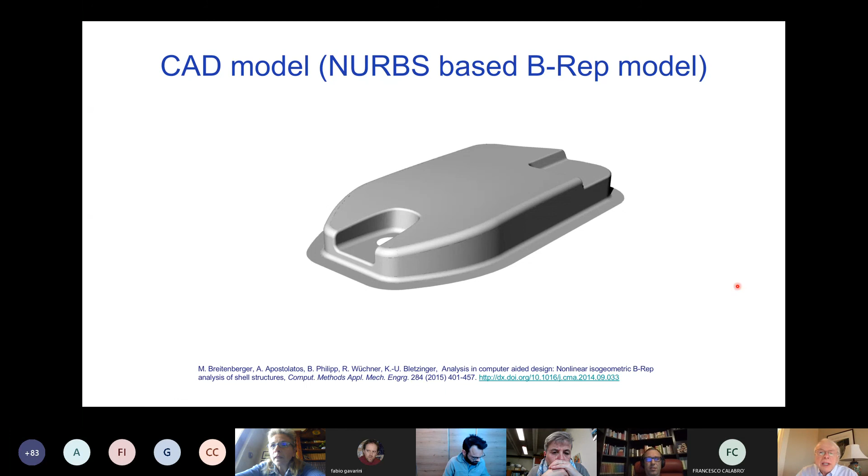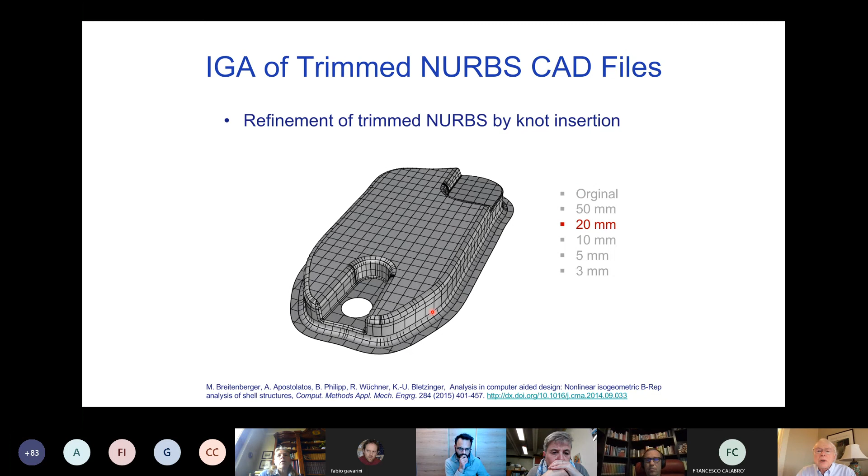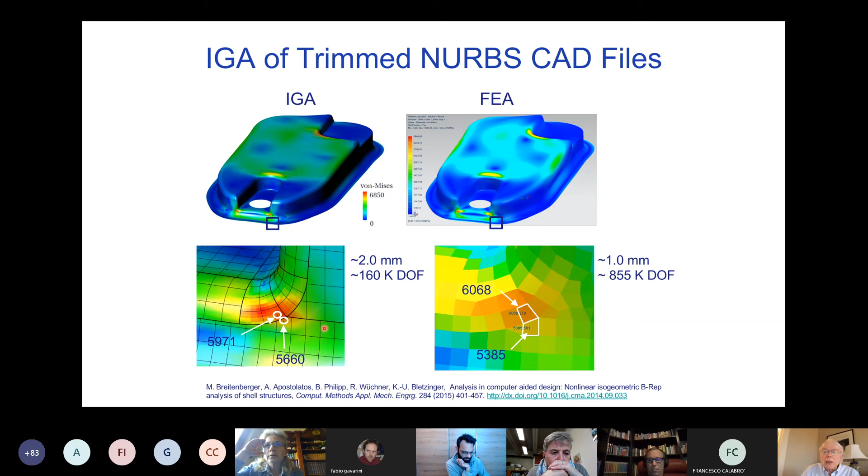That's not a good mesh for analysis. Too many little elements and big elements. So you want to uniformize it somehow. And you do that, and all that refinement is in the exact geometry. You never left the geometry. And if you compare results against an Abaqus calculation with many more degrees of freedom, there's no exact solution for this, obviously, but you can see the quality seems to be much better than the quality here.

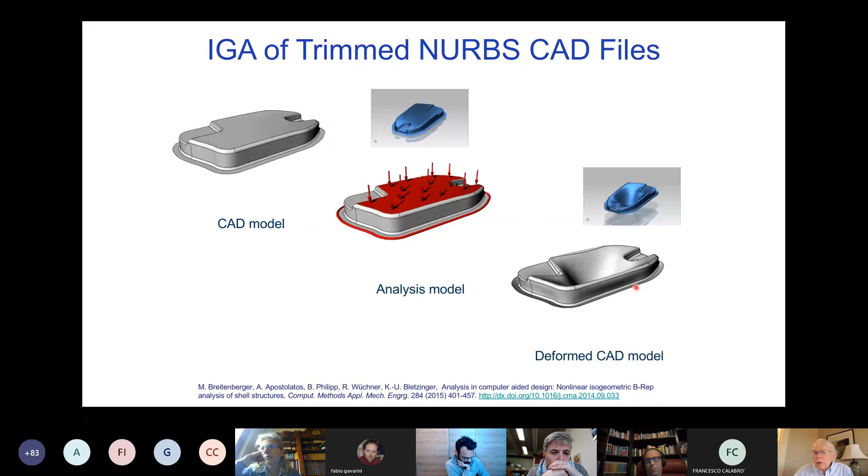And the main point, though, is you have done your analysis within the CAD file. So if you want to do shape change, they're already recorded in your CAD file. You're done. So you've closed the design through analysis loop, which is very important for productivity.

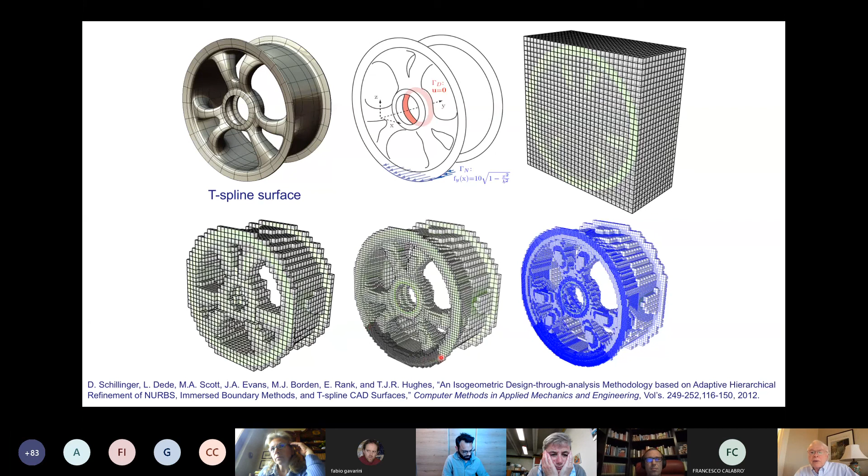Now, immersed methods. Suppose you have a pristine surface mesh through, let's say, an unstructured watertight T-spline, for example. That's what this is. So this is really a solid object, and it's still an ordeal to generate a solid mesh from something like this. What can you do? Well, you can use trim in the volumetric sense by dropping the surface CAD model into a box of B-splines, throw away the elements that don't intersect the actual design, do hierarchical adaptive refinement. This is an octree-based quadrature refinement scheme for the element forms, and you can solve the problem virtually automatically.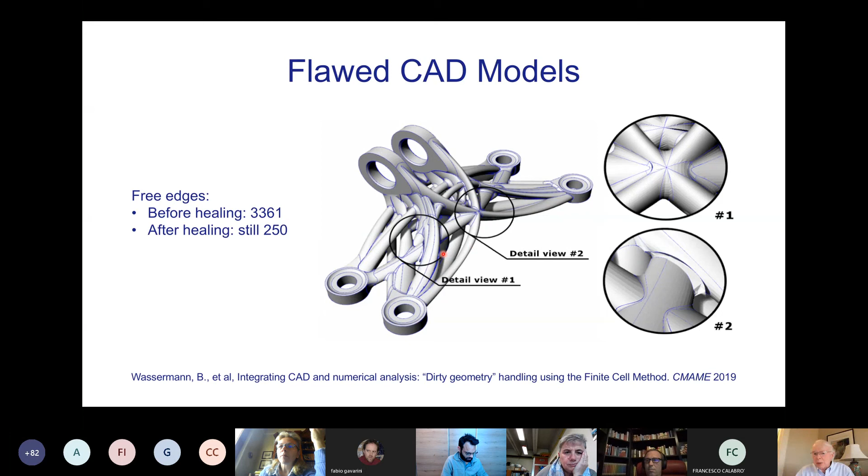And now that started with a nice B-spline, nice T-spline surface. Here's where you have a surface that is a nightmare. This object, which was generated, I guess, by topology optimization, and a CAD surface representation was made. It had roughly 3,300 gaps and overlaps of edges before it was given to healing software that is used for pre-processing finite element meshes. But there's still 250 thereafter, and there's some changes to the geometry. So I would say it's impossible to generate a decent solid mesh for this problem.

But again, you can just drop it into a box of B-splines, and you can solve the problem even without any mesh healing. You can take the flawed file. Now, this is work of Ernst Rank's group, and Ernst and Alexander Düster made the breakthrough in showing that you get the good accuracy with approaches like this, that in prior years one thought was impossible within trim and immersed techniques. So this is the way of really instantiating the isogeometric concept. You just use the CAD file and you do your analysis.

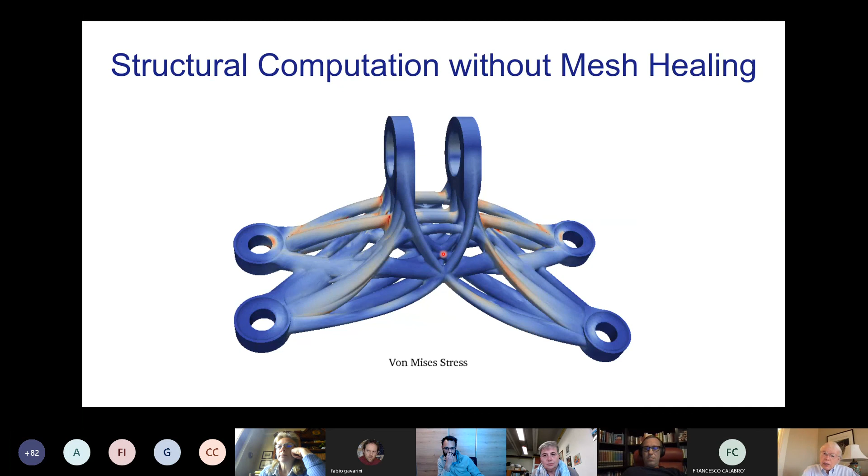The valve is in the Lagrangian description. The wall, the artery wall, is in the Lagrangian description. The fluid is in the arbitrary Lagrangian Eulerian description. The mesh is moving, and the valve is opening and closing immersed in the fluid mesh. So it's a combination of immersed and boundary fitted technologies. And there seems to be now a trend going where this may be the paradigm of the future, combining boundary fitted and immersed techniques in analysis.

So let me say a few words about the course that begins in earnest tomorrow, structure preserving methods, finite element exterior calculus, and isogeometric generalizations. I can't say much, I don't have much time, but I will say I know these two young gentlemen quite well, and they are really outstanding, so I think it's going to be a great course.

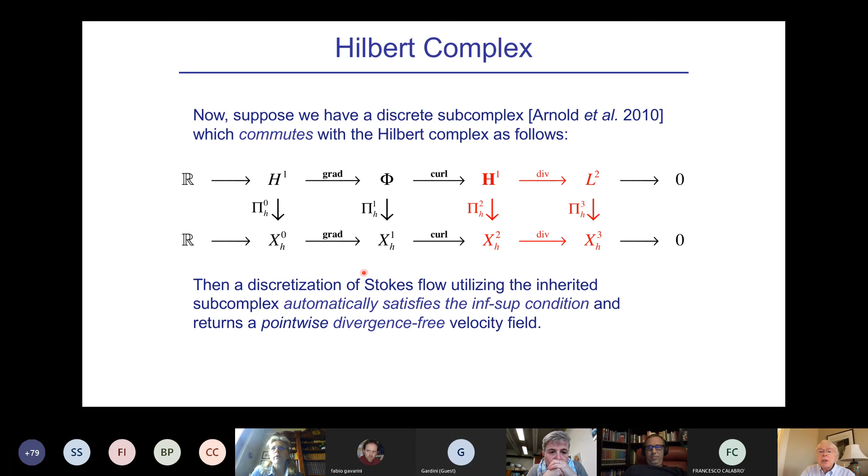And it's very simple to construct these velocities in the parametric space with B-splines. So your scalar potential is just, say, splines, tensor products of order P1, P2, and P3 in the three directions, continuity levels alpha 1, alpha 2, alpha 3. Then you can get your vector potential and your flow velocities by these representations here. The vector potential is you're just essentially lowering the polynomial order and the continuity simultaneously in X for the X component, in Y for the Y component, and Z for the Z component.

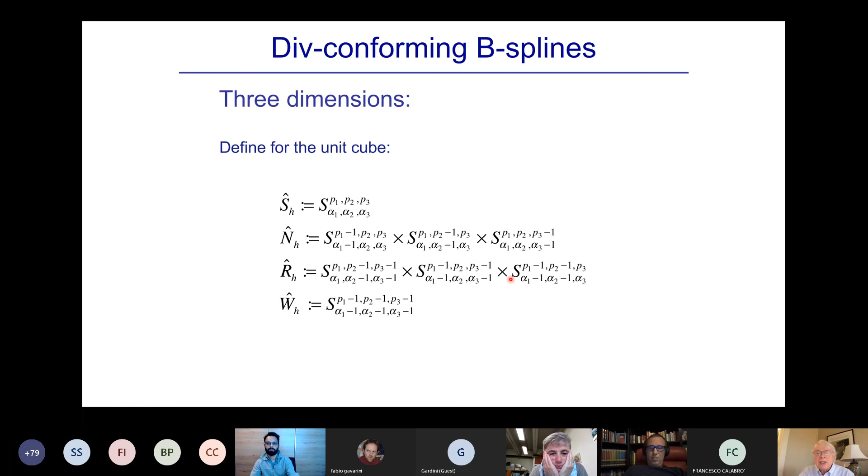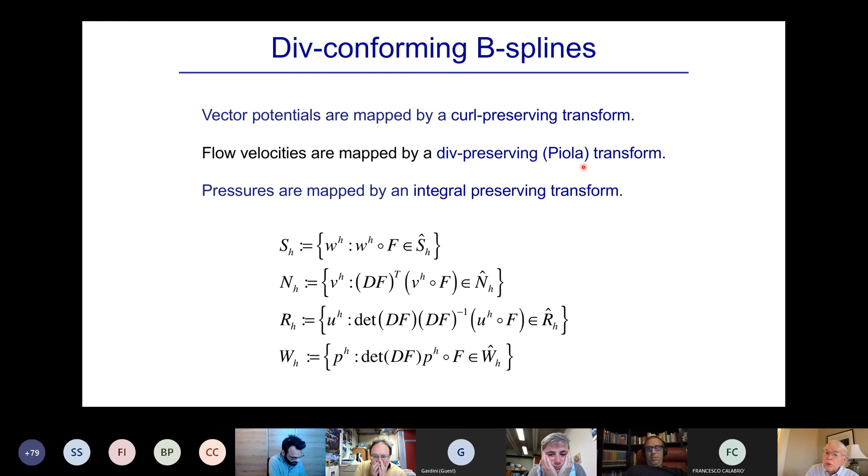These would give rise to so-called edge functions. And for flow velocities, what you do is you sort of do the obverse here. You leave, let's say, the one component alone for X, and then you reduce the 2 and the 3. And for 2, you reduce the 1 and the 3, and so on. And that gives you velocity fields. And then for the pressures, you just reduce everything. And so you can do that in the parametric coordinates. And then you have to transform these functions to the model space, physical space. So vector potentials are mapped by curl preserving transforms, flow velocities mapped by divergence preserving transforms. That amounts to the Piola transform for flow velocities, and then pressures by just integral transform.

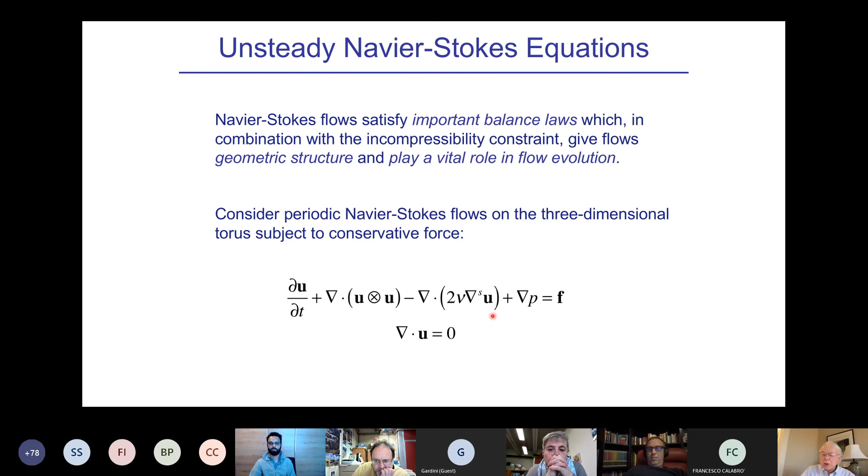So what's the upshot of all that? Why do you want to do things in this way and do these funny mappings? Why not just assume polynomials and stick with that as you do for other things? Well, you want to preserve features of various equations. And as an example, again, for, say, the unsteady Navier-Stokes equations written here that are governing incompressible flows, the geometric structure of the solution depends on really satisfying this condition exactly. So if you can satisfy it exactly with your discretizations,

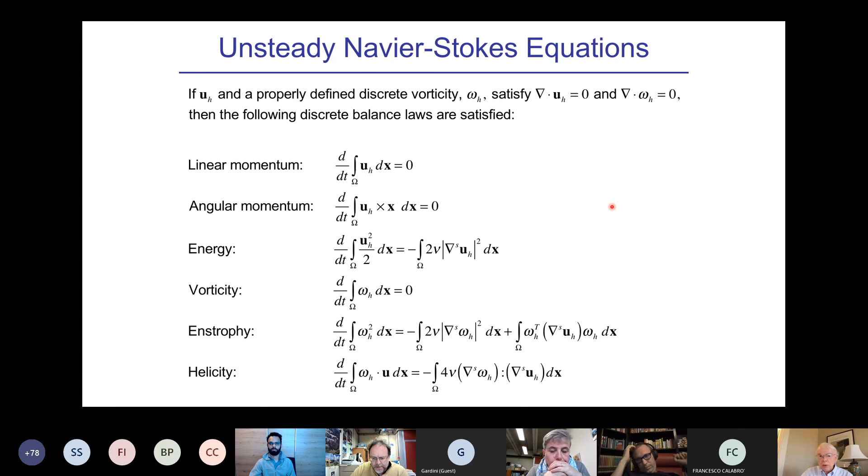then you will get a pointwise divergence free velocity field, a post-processed vorticity vector that is also divergence free, and all of the conservation laws and growth decay inequalities that are inherent in the exact theory of the Navier-Stokes equations, all of those integral balance laws and growth decay equalities, I should say, are possessed by the discrete solution. So linear momentum is preserved, angular momentum, energy, vorticity, enstrophy, helicity, everything that you would like to preserve, you get it exactly. You never get this if you don't have this type of a formulation. So this gives you a much more faithful approximation for very complex nonlinear processes.

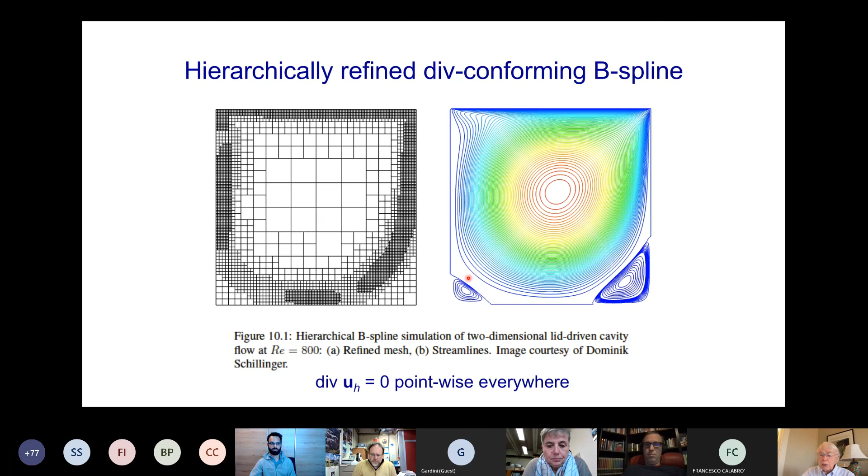All right, so that gives you a glimpse of an application of the kind of things that you're really going to get into the detailed mathematics of. It brings in a lot of mathematics that's beautiful mathematics from different areas: differential topology, algebraic topology, differential geometry, and analysis. That will all follow tomorrow and thereafter. So let me summarize with some final thoughts.

Isogeometric analysis is one of the most active areas of finite element and computer-aided geometric design research, both from engineering points of view and from mathematics points of view. The overarching goal has been to improve the engineering product design process, and everything has emanated from that. And the focus has been on the design through analysis process, although now many people are looking at manufacturing, additive manufacturing, and other generalizations of this utilizing isogeometric analysis.

There are increasing commercial activities. LS-DYNA has isogeometric analysis capabilities available, and they're being extended. Coreform is a startup company that is basically an isogeometric analysis company, modeling and analysis.

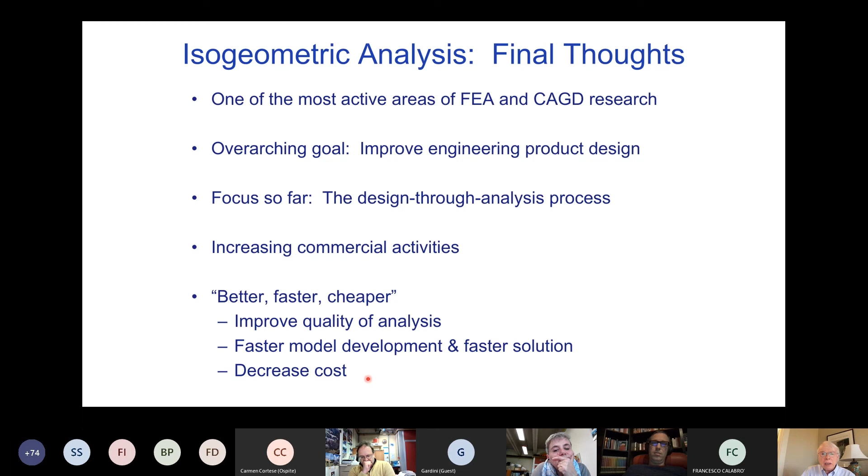So the main point, whenever you develop a new technology, an engineering technology, a product, there are really three axes: better, faster, cheaper. You want to get at least one. If you've got two, you probably have a hit. And if you're really greedy, you want to get all three. And I think with isogeometric analysis, in many situations, you can get all three. You can improve the quality of analysis, you can do faster model development and faster solution, and you can decrease cost. So with that, I will finish and thank you for your attention.

And since we're still in the pandemic time, I'll put my mask on too. Take it off.